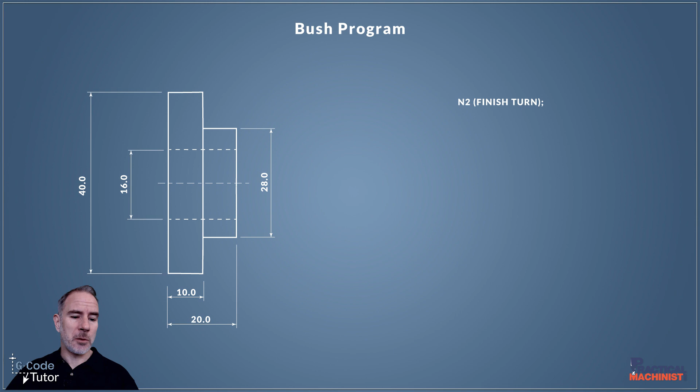Okay, so we're going to start off like we have done with the previous operations by using an N number, so we've got that search function. So we can quickly search down to N2 to find our finish turn sequence. So I've also used our operator's note here to label the sequence finish turn, and of course we end with an end of block.

So we're moving on to our safety line. Now I've explained this twice before in this series, so I'm not going to go into it again now, but this is the safety line that sets our machine up in a safe working system. But it might be slightly different on your machine. Every machine changes slightly, so it might not be the same as this one. Just be aware of that.

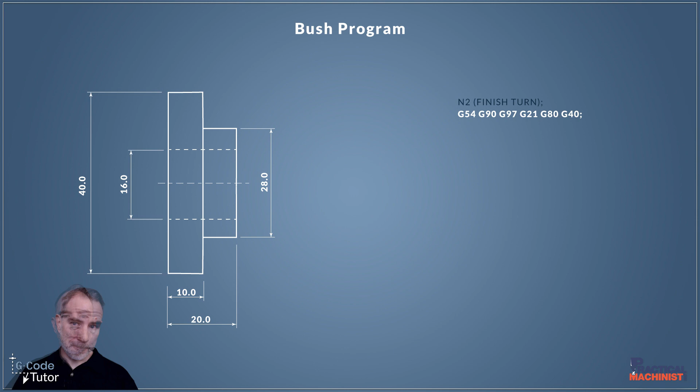So now we're going to do our tool call with T0202. So this brings in our tool to the center line and selects the correct offsets in our tool table. And we're going to do an M06 after that, and that activates our turret to rotate the turret to bring this tool into the center line.

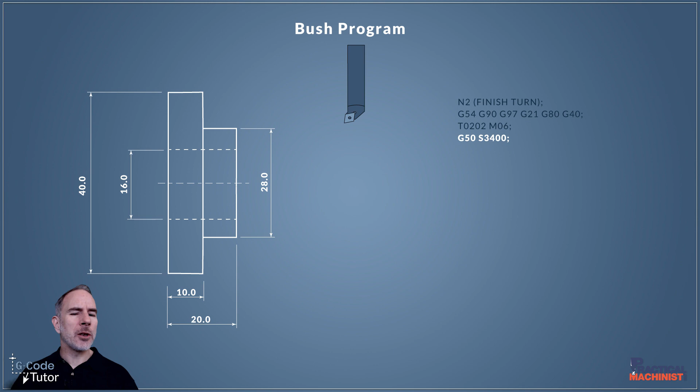So we're using G50 again on this sequence. So because we're using constant surface cutting speed, that means that the chuck will speed up or slow down depending on the diameter we are cutting. But we don't want that diameter to go to an infinite speed as the cutter approaches the center line.

So we put a limit on how fast our spindle will rotate. And we do that by using our G50 spindle speed clamp. And we set our maximum revs there with an S number. So we're not going above 3,400 RPM during this sequence.

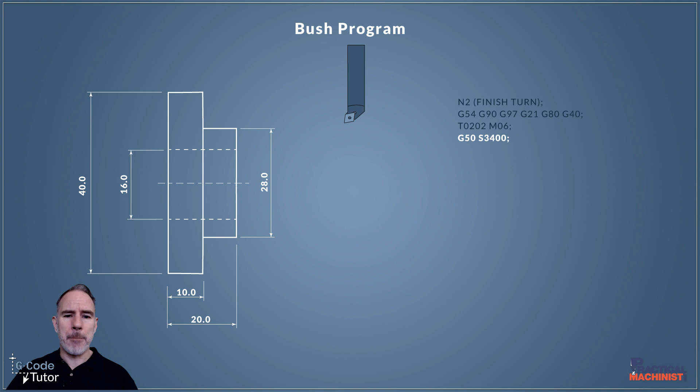So G96 sets our constant surface cutting speed and our constant speed right there with the S value. And M03 turns it on in a clockwise direction for our chuck. Now M04 is anti-clockwise. You might need to use that if we're mounting our tools backwards like we often have to do on lathes.

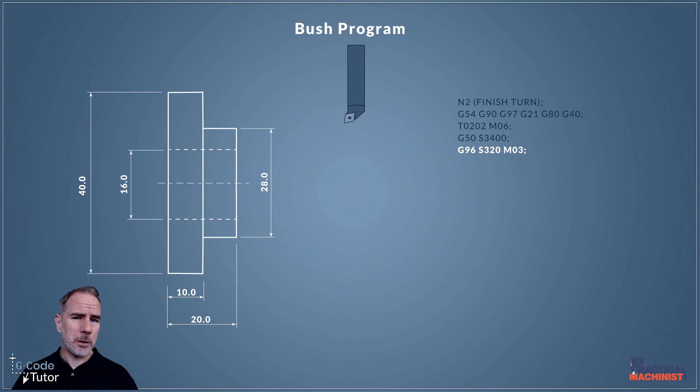So on this line we're going to rapid it in to a safe working position so we can face off the front of our part there with a finish tool. So we're going to rapid it in with G00. Our X dimension there is 2mm above the stock bar size, because if you remember from previous videos we had our bar size at 42mm. So you might want to increase this if that gets a little bit close or the bar has got ovality, etc.

So Z2 there brings our tool 2mm off the face of the part. Because we've set our working datum to the front of the part, 2mm gives us 2mm clearance to the right of our material there. And M08 turns on the coolant.

Next, we're going to switch over to G01, our feed rate linear movement command. And we're going to feed slowly into our Z position there, our Z0. I'm coming in on the feed move here and not rapid, just in case there's any material in the way, so we're not going to break any tools. It's more of a safety feature that I like to do, to feed into this position rather than rapid in.

So by using X-0.2, we're now bringing our tool down to the center line just to face off a small amount of material we left on when roughing. So why are we using X-0.2 and not X0? Well, we want to go just slightly past the center line to remove any pips. And if our tool is not perfectly on the center height, this will help compensate for that.

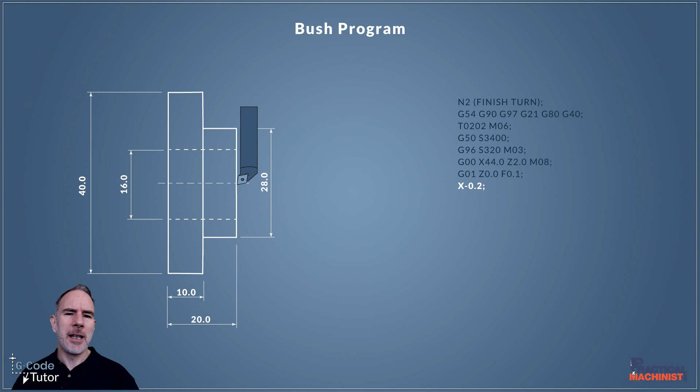So we're doing a 2-axis rapid move now. Because we faced off the front of the part, we don't want our tool rubbing against that face as we retreat back, because that face is now finished. So we're going to use G00 to rapid away, but we're rapiding away in X and Z at the same time. So the tool comes off at an angle and not straight up that face, leaving tooling marks on our nice finished surface. So everything we've spoken about so far we have covered in previous videos in this series.

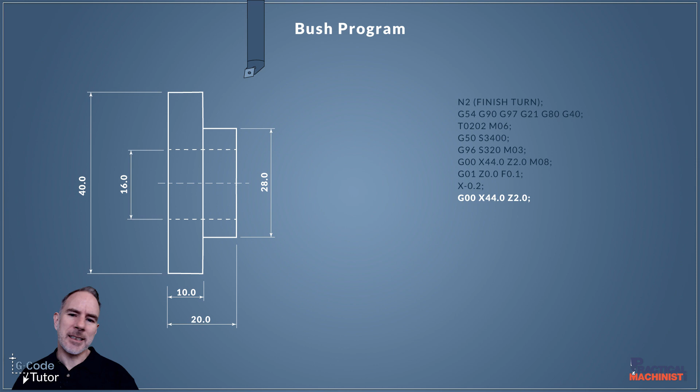But this is the interesting part, this is the bit we've not covered, and that's the finishing cycle, the G70. So this line, G70 P100 Q200, it looks back into our program at our subroutine. So let me explain that in more detail. So here is our rough turn that we've done in last month's video. Now the N100 there at the beginning and the N200, that is our subroutine from our roughing cycle.

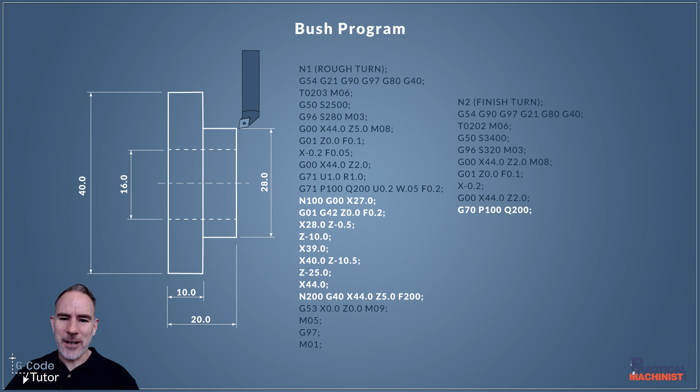So all we are doing is calling upon that subroutine again. We don't need to write the dimensions of our profile out because we've already done it. So we're just going to recall that information and rerun that sequence, but using G70 and not G71. So when we are using subroutines in this way, we can call upon our subroutine that we've previously programmed in our rough turn, and it makes our finish turn very quick and easy to program. That's all we need to do to get that tool to run over our profile there.

So after our G70 line, we need to rapid it back to a safe working position. So like before, I'm rapiding it back to X44, but I'm giving a few more millimeters of clearance on Z. So we're coming back to Z5mm. And these are more personal preferences. 5mm is a safe distance. But if you wish to make the program run a little bit quicker, we can shorten that once we know that there's no collisions going on there and everything is safe to run.

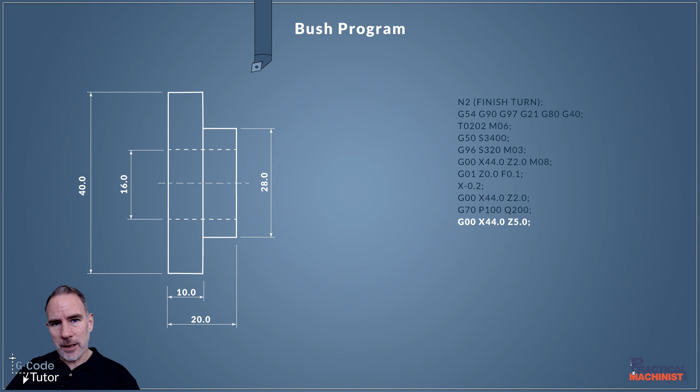So with our profile machined and our tool at a safe working position, we can now send our cutter home ready for its next tool change. So we're switching over to G53. Now this is the machine datum. So now all our dimensions come from the machine datum and not our working datum that's on the front face of our part. So G53 selects that datum. With X0 Z0, that takes it back to the machine tool change position usually. Sometimes it's in a different position, but generally our tool change position is on our 0 position on the G53 datum. And we're using M09 there to turn off the coolant. M05 stops our spindle from rotating.

So G97 puts our machine back in the standard RPM control mode rather than the constant surface cutting speed. So because we've used constant surface cutting speed, I like to switch back to G97 before the end of the sequence. That way, if we have to stop the program at all, we should be in the normal RPM mode and not constant surface cutting speed.

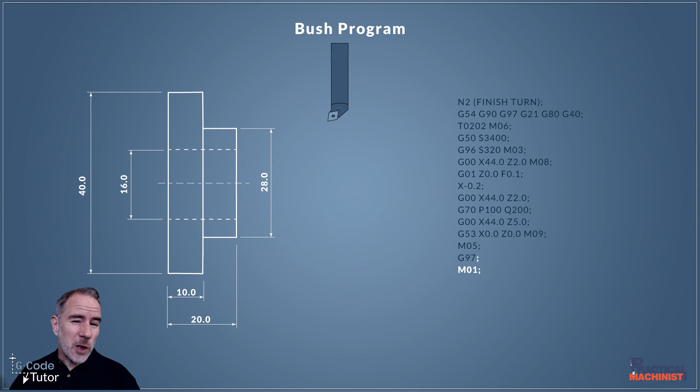And M01, I like to finish all of my sequences on M01. This gives us the optional stop, so we can stop the machine if needed to check our parts, to measure, to make sure everything's fine in there, maybe remove some coolant. And of course it's optional. If we push that button on the controls, the machine will stop there. If we don't push the optional stop button, it will not. So it's a great way just to check the machine and check our part if we need to.

So that's how we use a G70 to finish turn a part by using a previously written subprogram from a different section of the program.